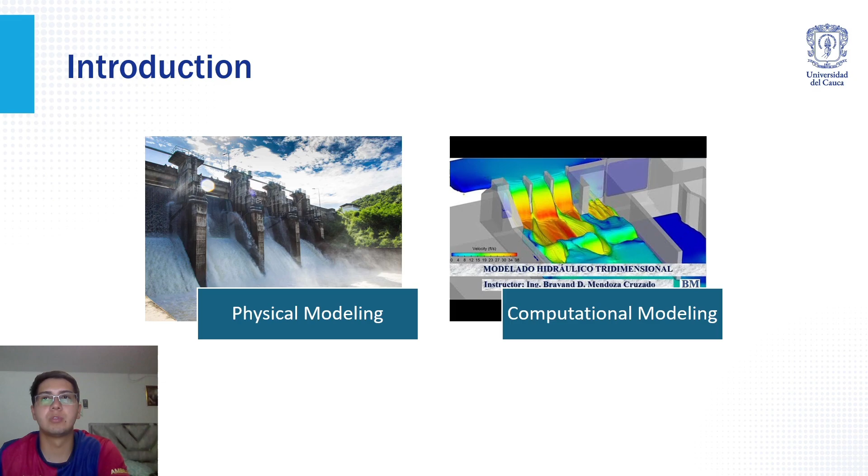and computational or numerical modeling, based on the mathematical solution of governing fluid flow equations using specialist software. Each has its advantages, limitations and specific applications. The choice between them, or using a combination, depends on the problem to be solved, available resources and required precision.

Physical modeling description. Physical modeling involves building scale models in hydraulic laboratories. These models replicate key features of hydraulic systems like canals, dams, spillways, rivers, and hydraulic structures. Advantages: allows direct observation of flow behavior, ability to visualize complex phenomena such as turbulence, vortices, swirling, or scour, ideal for validating innovative solutions or unconventional structures.

Disadvantages: expensive in terms of time and money, requires specialist facilities and limited scalability. Not all phenomena can be accurately replicated at scale.

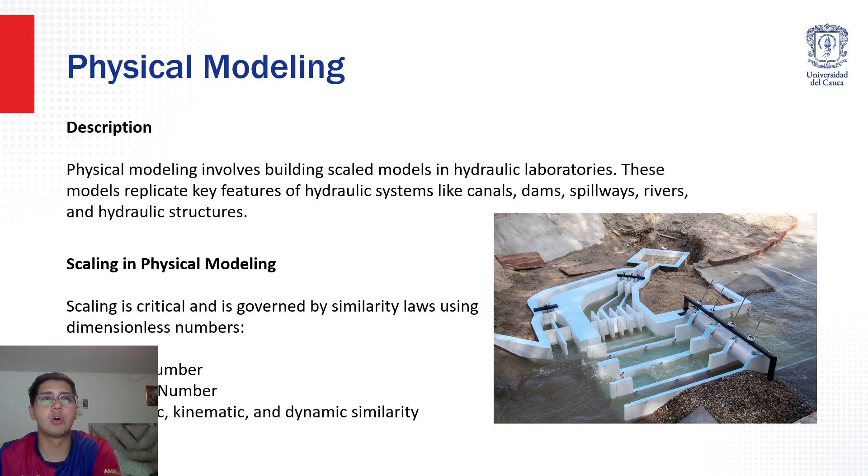Scaling in physical modeling: scaling is critical and is governed by similarity laws using dimensionless numbers. Froude number, preserved when gravity dominates the flow, and Reynolds number, important to characterize laminar or turbulent flow. Geometric, kinematic, and dynamic similarity are fundamental to ensure model behavior represents the prototype. It is often not possible to preserve all dimensionless numbers simultaneously, so corrections or simplifications must be made.

Computational modeling description: this approach uses mathematical equations, Saint-Venant equations for open channel flow or Navier-Stokes for more complex flows, to represent hydraulic systems. These are solved numerically using specialized software. Advantages: lower cost and time compared to physical models, allows simulation of multiple scenarios and sensitivity analysis, can integrate real topographic data through GIS and satellite information.

Disadvantages: requires advanced knowledge of mathematical physics and programming, results are highly dependent on input data quality and proper model calibration, and it is difficult to represent highly localized turbulent phenomena without significant computational power.

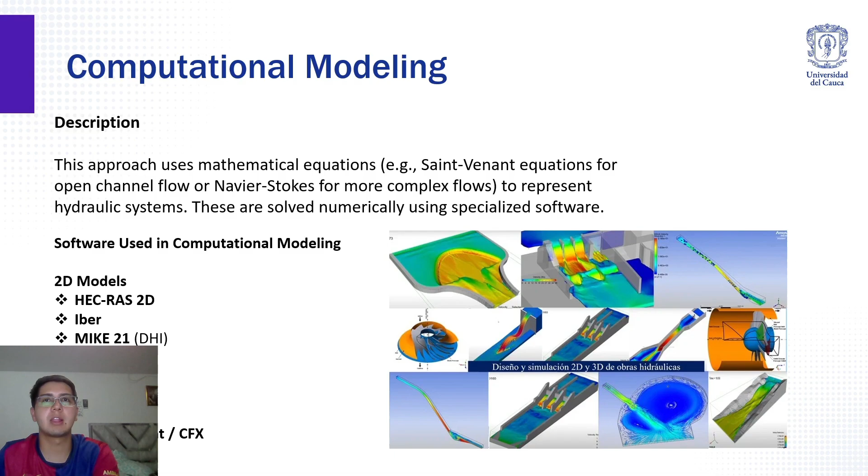Software used in computational modeling. Two-dimensional models: HEC-RAS, two-dimensional surface flow; Iber, open source software developed by Spanish universities; MIKE 21, two-dimensional simulator for water bodies. Three-dimensional models: FLOW-3D, used in complex hydraulic simulation; OpenFOAM, open source software for computational fluid dynamics; and ANSYS Fluent/CFX, commonly used in the industry for CFD simulation.

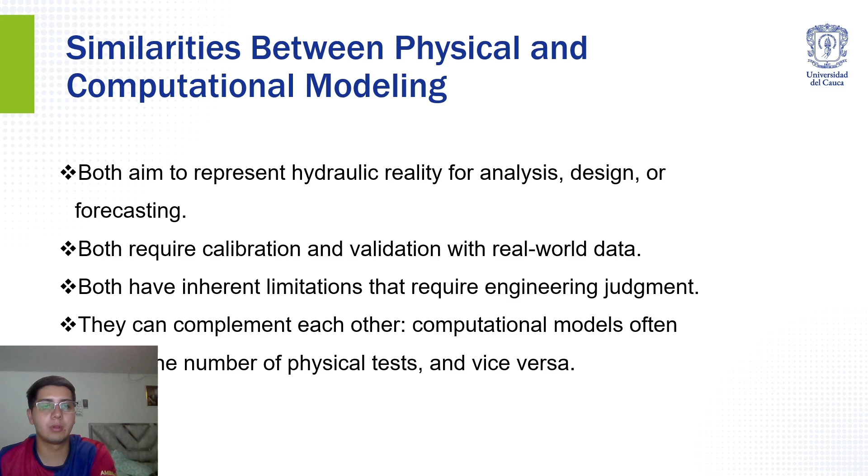Similarities between physical and computational modeling: both aim to represent hydraulic reality for analysis, design, or forecasting, both require calibration and validation with real-world data, and both have inherent limitations and require engineering judgment. They can complement each other. Computational models often reduce the number of physical tests and vice versa.

Key differences between physical modeling and computational modeling. Features: representation, scaling, costs, scenario flexibility, direct visualization, phenomena reproduction, implementation time. Representation: for physical modeling, a replica in a laboratory, and in computational modeling, a mathematical simulation on a computer. Scaling: requires similarity laws, versus not required, works at the real-world scale. Costs: high, materials, space, maintenance,

versus relatively low, dependent on hardware and software. Scenario flexibility: limited, versus high for computational modeling. Direct visualization: yes, intuitive, versus via graphics and post-processing. Phenomena reproduction: excellent for complex physical phenomena, versus, in computational modeling, dependent on model resolution and numerical setup. Implementation time: physical modeling long, computational modeling shorter in general.

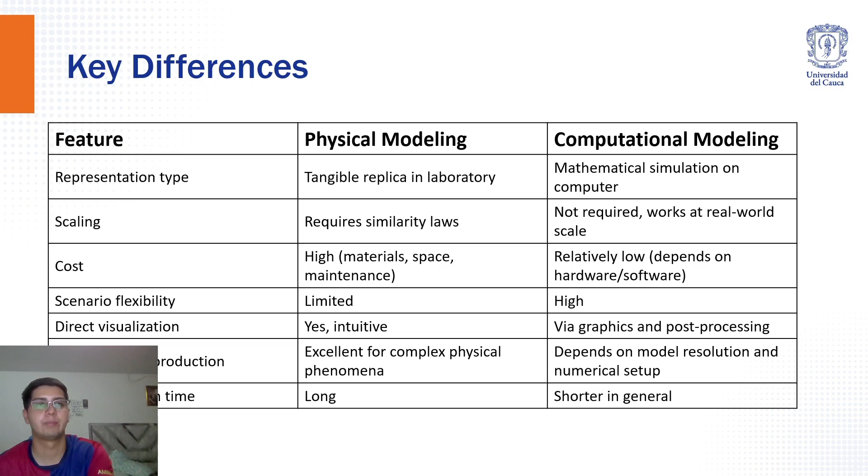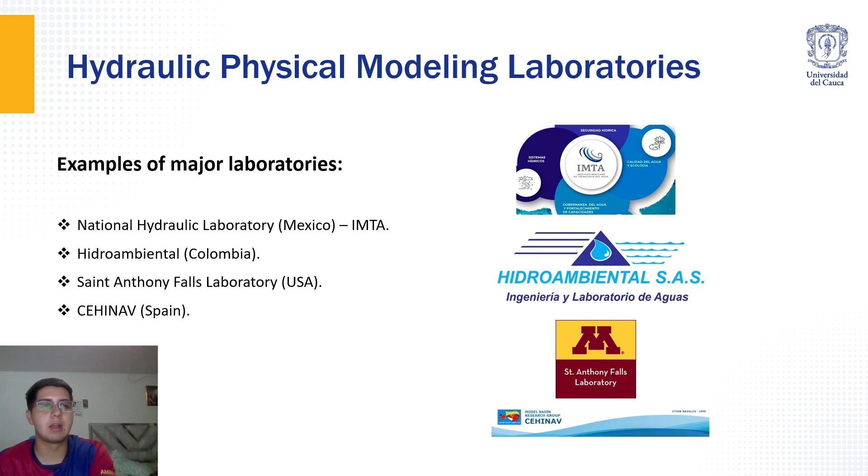Hydraulic physical modeling laboratories. Hydraulic laboratories are equipped with adjustable slope channels, sedimentation tanks and model structures, data acquisition systems, cameras, level sensors, velocimeters, instrumentation to measure pressure, flow rate, velocity, and three-dimensional printing tools to manufacture scaled components. Examples of major laboratories: National Hydraulic Laboratory of Mexico, Hidroambiental of Colombia, Saint Anthony Falls Laboratory of the United States, and CEHINAV of Spain.

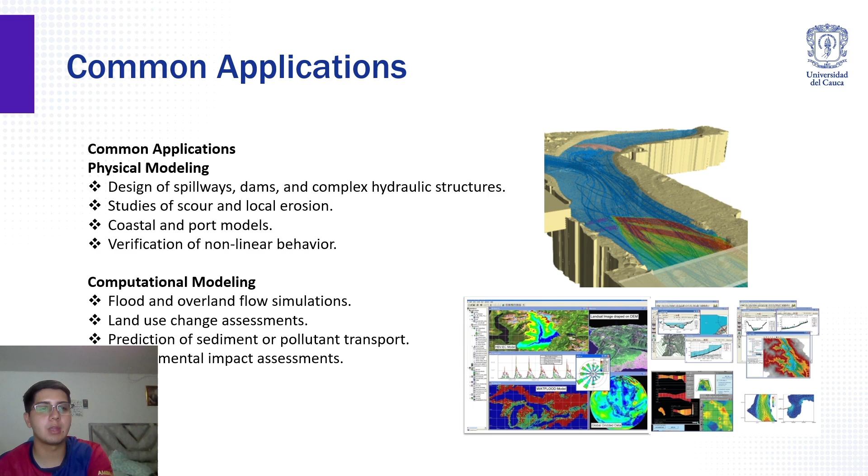Common applications. Physical modeling: design of spillways, dams and complex hydraulic structures, studies of scour and local erosion, coastal and port models, verification of nonlinear behavior. For computational modeling: flood and overland flow simulation, and land use change assessments, prediction of sediment or pollutant transport, and environmental impact assessments.

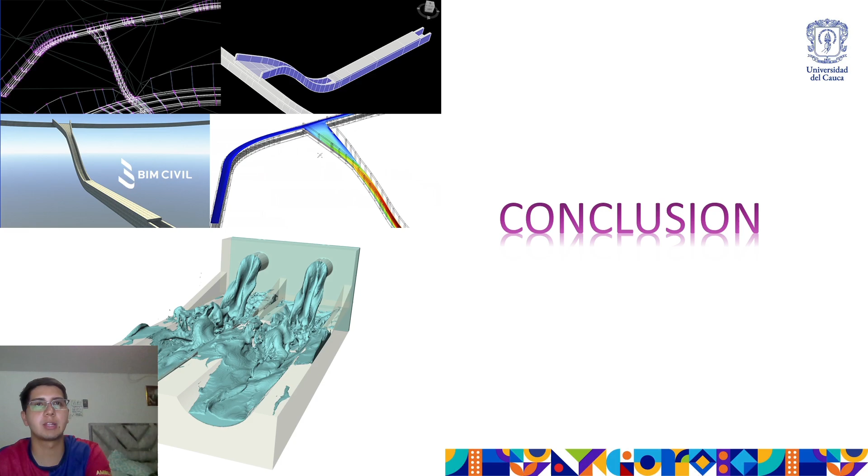Conclusion. Physical and computational modeling are complementary tools. The current trend in hydraulic engineering favors hybrid models, where computational simulations support preliminary design and physical models validate key or innovative elements. The choice depends on project conditions, required detail level and available resources, but both approaches require specialist technical knowledge and in-depth understanding of hydraulic phenomena. And thank you very much for your attention.